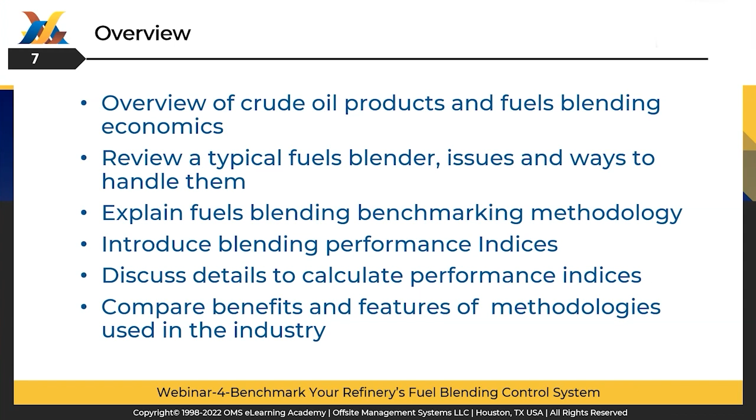If you look at 1 barrel of crude oil, there are many products—as a matter of fact, plus 5,000 products made in the refinery. Out of those products, the majority are gasoline, fuel oils, and kerosene, and they constitute about 75 to 85% of the products made in the refinery. Most of it is gasoline, which is sometimes 45 to 55%. Processing 1 barrel of crude has a processing gain in terms of volume, about 5%. Mass, as you know, remains the same.

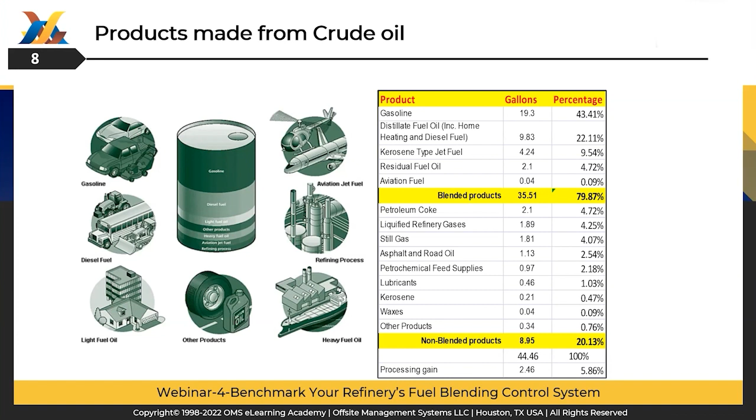Now let's look at gasoline. What happens in gasoline production? So I took an example of 100,000 barrels per day, and we say 45% is gasoline production. Taking the baseline gasoline price and all the taxes, distribution costs, refining, crude oil, etc., the profit is only 42 cents per gallon of gasoline. Now, this number could change based on the economics, the price of gasoline in the country, etc.

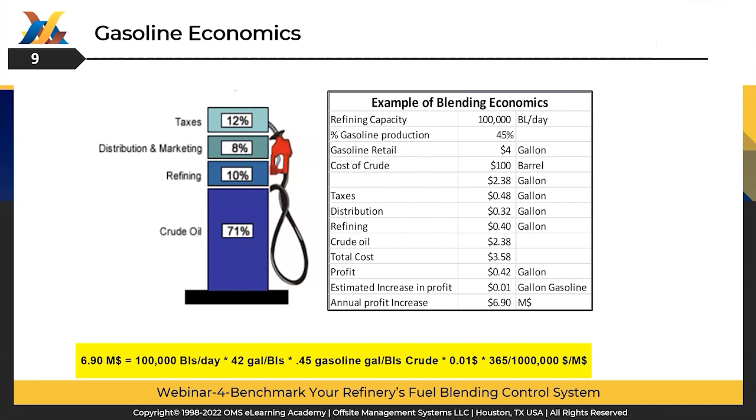But the point is that if you save 1 cent per gallon of gasoline by automation, by strategic efficiency in the blending process, you save about $6.9 million yearly. And if we say a 300,000 or 600,000 barrel per day refinery, you can multiply that number. Now, these are the benefits lost in the refining process due to inefficient blending and not having automated infrastructure. So there is a potential in crude blending, and that's why fuel blending is on the mind of refinery management.

If you look at the typical blender automation areas, it has about 11 modules, starting from lab analysis, tank farm, automatic tank gauging system, DCS, field equipment, additive control system, online and offline optimizers, blender, and terminal and dispatch system. This 11-module configuration is generic for a fully automated blending system for any refinery, and it requires no or very little manual intervention.

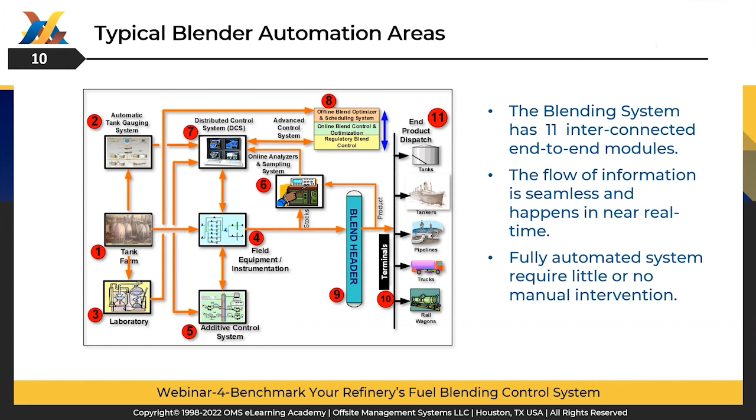So the purpose of this is, what do we know about our blending system? In my 40+ year career in downstream refining, I have done 15-20 blending projects and master plan studies. And every time I go to a refinery, I ask two questions to refinery management.

The qualitative question: I ask them, how good is your blending system? And I get an answer, oh, it is one of the best in the world. Our blending system does not need any more improvement. We don't have any issues in quality giveaway, recipe optimization.

Then I ask them the second question: give me a quantitative assessment of your fuel blending system. Can you rank your blending system absolutely or relatively? No, we cannot. But we know it's best in the world. We cannot give you any numbers because we don't know.

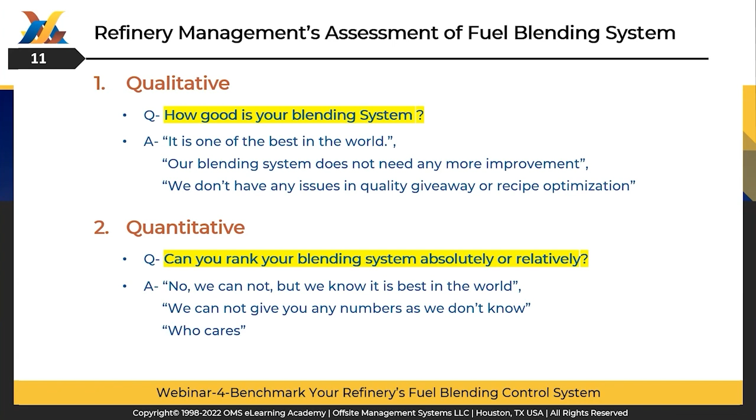Who cares? Now, this is not a made-up story of question and answer. These are real. And I have gone through this again and again over 40 years at different refineries.

Yet management has a concern, which may be hidden, not spoken very well. They always feel: is our blending quality giveaway minimized? Is our blending profitable? How does our blending performance compare to our corporate refineries or with other worldwide refineries? If we have to automate or revamp our blending system, what's the budget? What's the ROI? And how long will it take to get our money back? Or do we have enough trained blending engineers in the refinery who can maintain the system and execute the project?

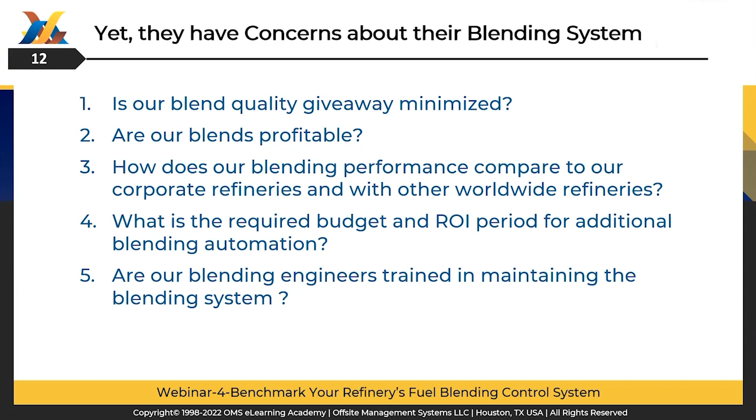So these are the questions they always have in their minds, but they don't know how to answer them. So what do they do? They have 4 options. They sometimes award a project to companies or consultants who conduct a master plan and feasibility study.

It costs around $100,000 to $150,000 for a study and takes 6 to 12 months. The advantage is it has a very detailed study and it creates a master plan for revamp. The disadvantage is that it does not address the blending in detail and does not offer KPIs to monitor after the revamp is done.

The second, less expensive option is they use refinery engineers who have 5 to 10 years of experience and do a similar type of study. It takes $15,000 to $20,000 per study and takes 1 to 3 months. It has a low cost, but again, it does not have enough in-house expertise to look at the blending system and say, hey, this is where we stand. I can rank it, I can see it, but it doesn't answer all the benchmark questions.

The next option they have is to participate in an external survey like Solomon Associates, who do a survey every year or every 2 years, and they look at the APC and blending. I've seen one of those surveys. What they do is sort of a survey across the industry, but it does not compare and benchmark the blending system per se. So again, it has some advantages and disadvantages.

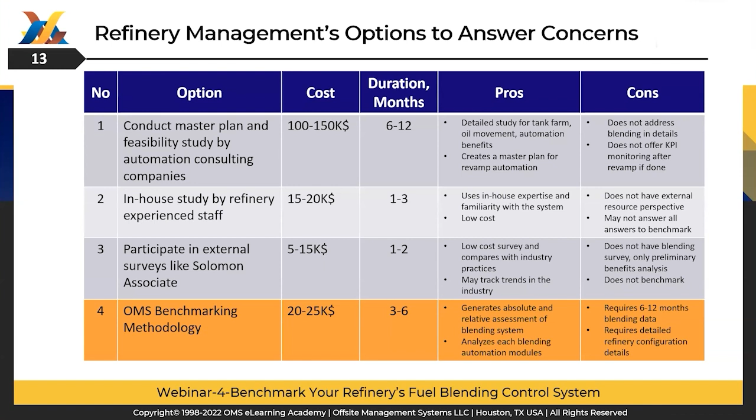So the concept of benchmarking a fuel blending system starts with creating a gold standard for a fuel blending system. Now, whenever you do benchmarking, you have to compare with something. What is your ideal situation? What is the ideal configuration?

And the gold standard should be refinery-independent with maximum level of objectivity. What I mean by that is, if I do an assessment and somebody else does the assessment, their own views should not have much impact on the benchmarking system. It should be plus or minus 10%. That's the purpose of the gold standard.

It should take into account how it gets affected by manpower, automation, HSE (health, safety and environment), and tangible benefits. It should generate qualitative and quantitative assessment ranks to compare with other refineries. It also should assess how effective the refinery infrastructure is for the blending system and how efficiently the blendings are executed.

It should have a definite map to compare with the gold standard, and accuracy should be plus or minus 10%. And it should give a pretty good idea of how long it will take to achieve those ROIs. So we're going to discuss all this in detail, but these are the concepts and guidelines for creating a benchmarking system.

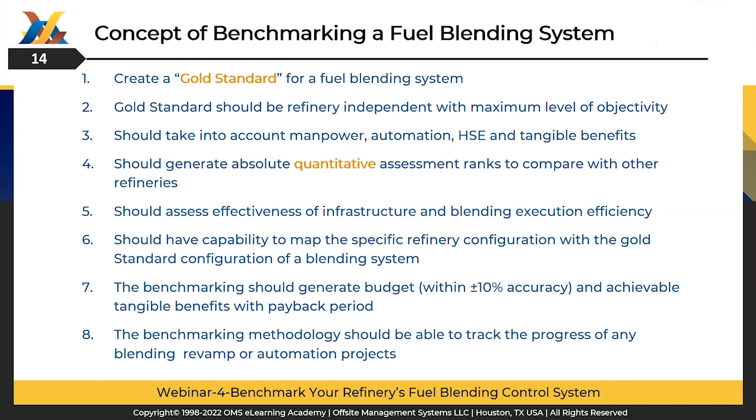So what is a gold standard? Let's look at a blends component circuit. What is the ideal configuration?

So I have two tanks for a single component and two tanks for a single grade. Now, if I have an ideal situation, ideal configuration, and this is real - I've done refineries in USA and other countries.

Each component should have two tanks, and it should have operated manual valves at the inlet and motor operator valve at the outlet. It should have sufficient pump to pump the recipe based on how much flow it has to pump to the tank, and it should have a spare pump in case one pump burns out, so it can switch to another pump.

Pressure controller to circulate and start the pump. Then we have a motor operator valve, control valves on the inlet of the blend header, before the blend header, and then the inlet to the tanks. Now, this configuration is the gold standard to completely automate the blending process.

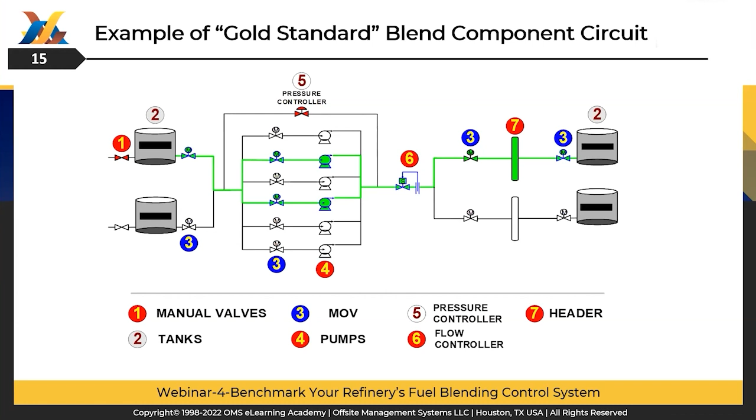Now, if I have an 8 component blend, I should have 16 tanks for the components. So we compare this gold standard with what refineries have in their configuration. This is just to give you an idea for one component circuit, and likewise we have the gold standard for all the 11 automation modules that I discussed before.

So in the concept of benchmarking a blending system, we create 2 indices to answer the question: Automation Effectiveness Index, that answers how automated are blending operations. The second, Operational Efficiency Index, asks how well are blending operations executed.

It reflects individual refinery potential. It generates budget estimates, return on investment and payback period, and allows meaningful comparison between refineries, whether it's in the same corporation or another corporation.

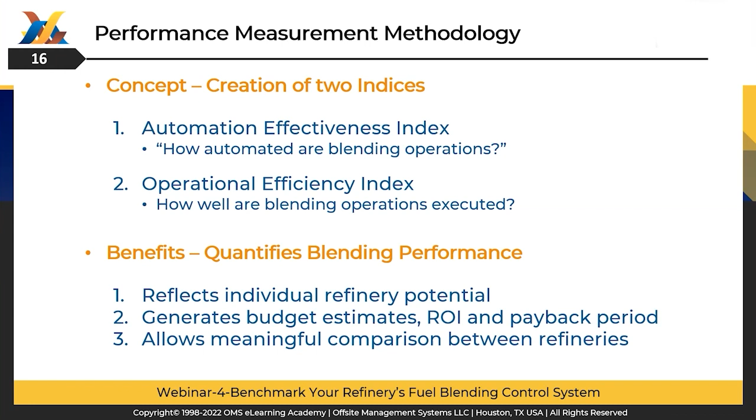So in terms of top-down methodology for benchmarking, the first step is we create a refinery independent gold standard baseline. We categorize each system module.

We give relative weights of significance of each module - tank farm versus the analyzers and so on and so forth. And then we'll drill down each module component and the relative weighted significance. You will see all this in detail.

Then the second step is we take the gold standard and compare with the refinery configuration. How much does the refinery have? It has an 8 component blend - so does it have 16 tanks for the components or 10 tanks for the components? And how they juggle around between tank to tank.

Then we assign weighted ranks for all the drill down components and composite weighted ranks of module. Then the next one we do the execution efficiency and loss benefits.

For that, we re-optimize the historical blend recipe for 6 to 12 months that the refinery had done and compare with the executed recipes, and summarize the lost tangible benefit. We'll go in detail.

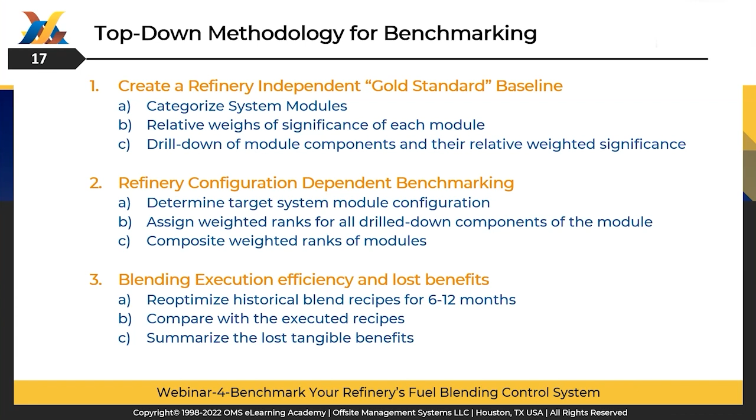So step 1, we assess the automation effectiveness of the blending infrastructure. Now, infrastructure means all things that you can feel and see: tank farm, analyzer, pumps, valves, blenders, and so on and so forth.

So you have 11 modules, and for each of the 11 modules, we create a gold standard blending system or sub-module. So we look at each and every module of the blending system. Then we...

superimpose the manpower, automation, HSE, and benefit factors. So there are 4 factors for anything that affects the automation - not only of blending, but anything in a refinery or any manufacturing plant. And then we generate a generic relevance matrix based on that.

And then we superimpose a specific refinery blending system configuration, and we create the refinery specific ranking matrix. And then at the end, we create 2 indices: effectiveness and efficiency.

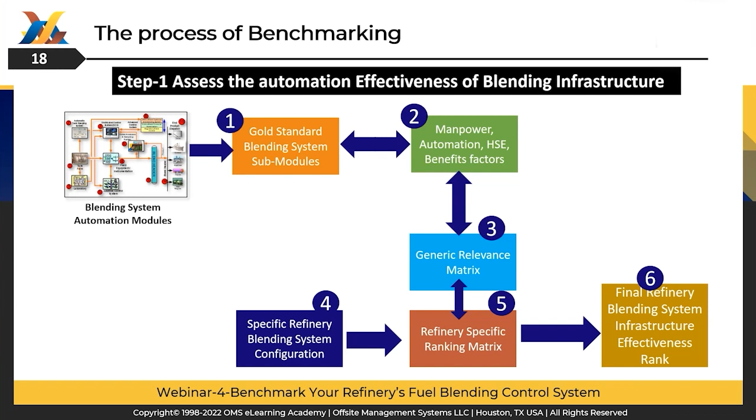Now, if you have attended our previous webinars, we talked about the MCOR strategy for the blending system in general, and specifically for the refinery.

For managed infrastructure, it comes to tank farm, tank gauging system, field equipment - anything and everything used to manufacture and control the system. Then we come to the control manufacturing aspect of MCOR, which has a control system, regulatory blend control system (RBC), advanced control system, offline optimizer, and scheduling system interfaces.

Then we go to the optimized production. It has linear, nonlinear blend models, optimizers, and customized blend model parameters. And finally, reconcile the blend models.

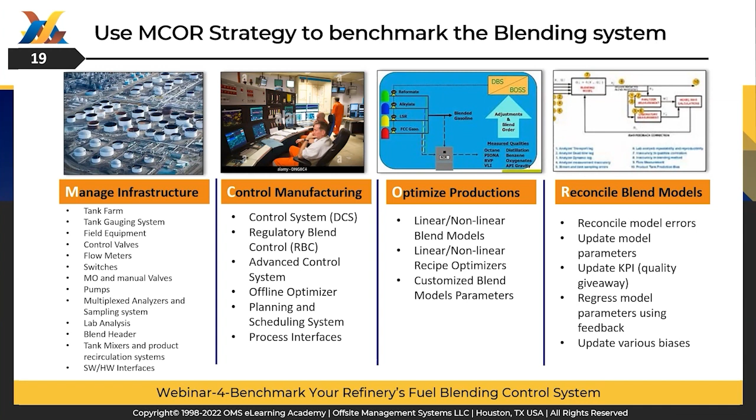How did we do? What are the blend errors? Our blend model parameters update KPIs, quality giveaway, regress model parameters, and update various biases. So we break down our benchmarking system into 4 areas: MCOR.

Now, taking the blending system and all 11 modules, we come up with a relevance percentage matrix. It means how relevant is tank farm, 9%, tank gauging system, 13%, and we come up with all these numbers which total up to 100. Now you may wonder, how did we come up with these numbers? What is the criteria behind it? What is the rationality behind it?

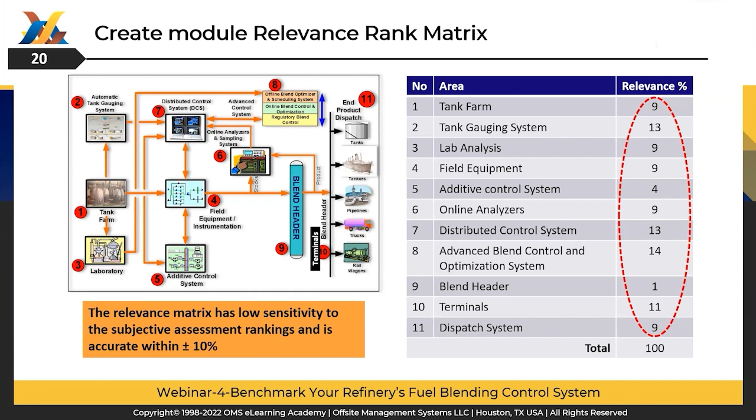Let's see it next. So for each of the relevance factors, there are 4 variables which are affecting those metrics. These are manpower, automation, health safety environment (HSE), and tangible benefit. Now, in my experience of 40 plus years in downstream refining, I saw that we can allocate the relevance factor as manpower 15%, automation 35%, HSE 20%, tangible benefit 30%.

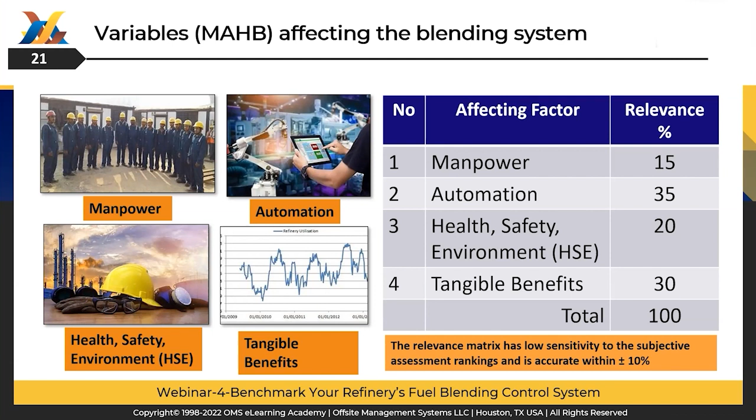Now the question will come to your mind: okay, this is what you did, Dr. Agrawal, what if I have to do that? Yes, there's a little bit of subjectivity in this assessment, but no matter how you do it, the accuracy will still remain within plus minus 10%. The sensitivity is very low, and we'll see how it is possible.

So in terms of manpower, what does it mean? It means the manpower in the field has to start and stop, close and open field equipment, tank sampling for analysis, manual tank gauging. Not every refinery has an automatic tank gauging system, meter analyzer calibration, etc.

Automation, we can do those: manpower in terms of auto start, stop, valves, field equipment, online analyzers, tank gauging system, auto analyzers, calibration. In terms of health and HSE: tank spills due to overflowing, valve leaking, fugitive emission of tanks and field equipment, pumps tripping, explosion and fire hazard. The benefits: real-time tank inventory, increase in blend productions, minimum quality giveaways, and oil movement, etc. So all these four variables do affect how we rank our blending system modules.

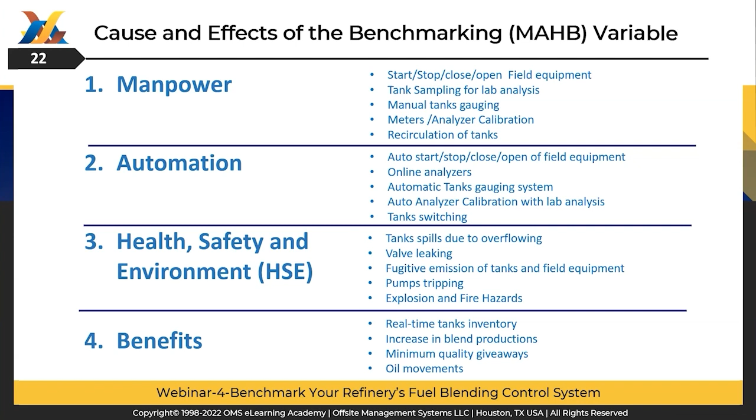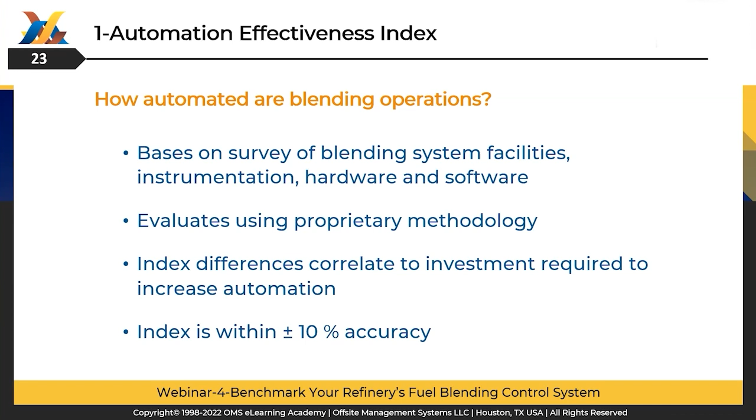So we start with the automation effectiveness index for the infrastructure. The question we ask: how automated are blending operations? Based on a survey of blending system facilities, instrumentation, hardware, and software, we use a proprietary methodology to evaluate each of the modules, then find the index correlating to required investment to increase automation. An index is accurate within plus minus 10% accuracy.

So for that, we have to create a scale. Now the scale goes from 0 to 100. So what's the minimum scale? The minimum is that all the valves, all the pumps are manual. You have to turn them manually and push them manually. You have inadequate stock tankage, manual tank gauging system, no DCS, PLC, APC. Lab analysis not available on a timely basis. Recipe based on an algebraically linear model. So this is the absolute zero index.

Now, I've seen this totally manually operated blending system in the refinery. Things have changed a little bit.

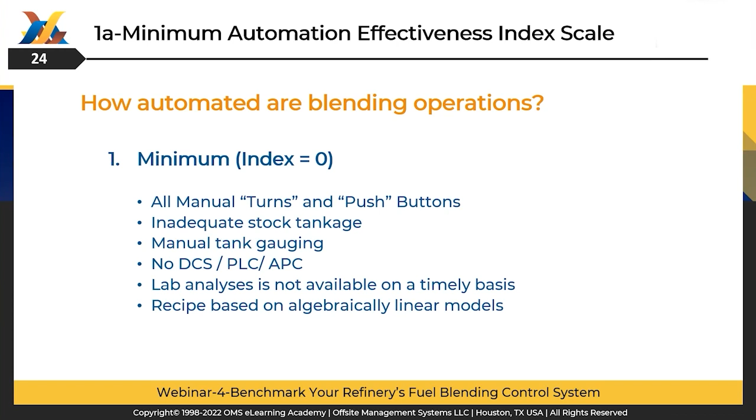So the next comes 100. What is index 100? It means a very automated refinery blending system. All the pumps and all the turns of valves are automatic and they are remote. They have enough and optimum stock tanks for the product tanks and stock tanks. Automatic tank gauging with all required signals, temperature, pressure, and density, etc. DCS and 3 layers, 3-tier blend control optimization system, online analyzers, and all that we call the gold standard of blending system. That's a scale of 100.

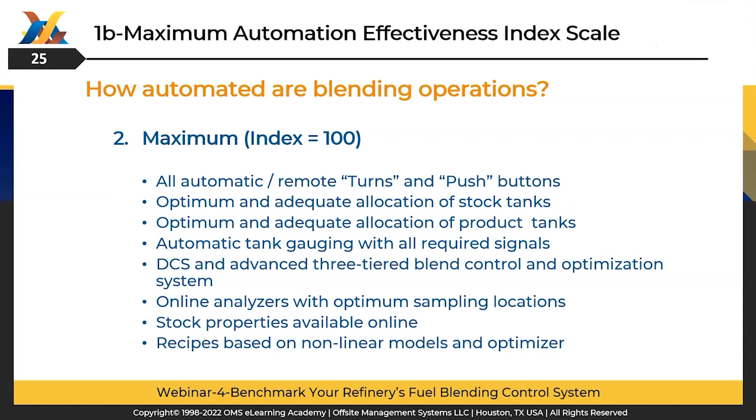So all the refineries will reach somewhere between 0 and 100. There's nothing at 0 right now and nothing at 100 right now. There's always a gap, even for the most automated refinery in the world.

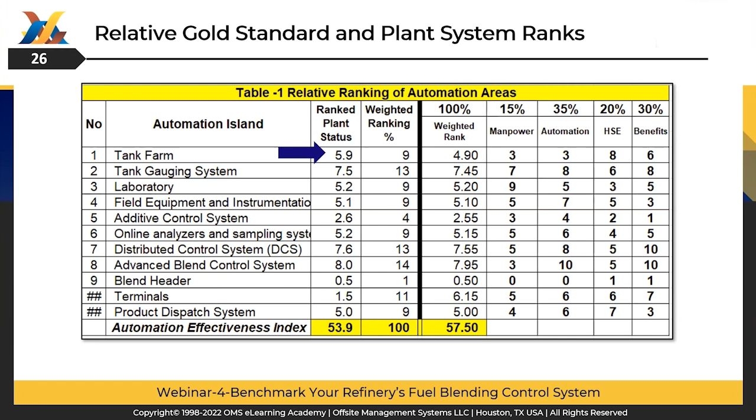So you may wonder, how did we get this 5.9 number for a tank farm? Let's look at the next one. So for the tank farm, we go in detail.

We'll drill down every aspect of it. Adequate number of paired component tanks, product tanks, automatic tank gauging system, tank alarms, interfacing, DCS, APC, streams pooling, fugitive emission monitoring, strapping table availability.

And based on that, we again go to manpower, automation, HSE, and benefits, and we give a ranking based on our experience in the industry in general or in a particular refinery in particular. And then we decide that, okay, we have a 0.53 as the ranking, and our plant is 60%.

And what does 60% mean? It means that if I have 8 component blend, and I suppose you have a 16 component tanks, but if I have only 10, so we take 10 divided by 16 and say our plant is only 60% of what's supposed to be.

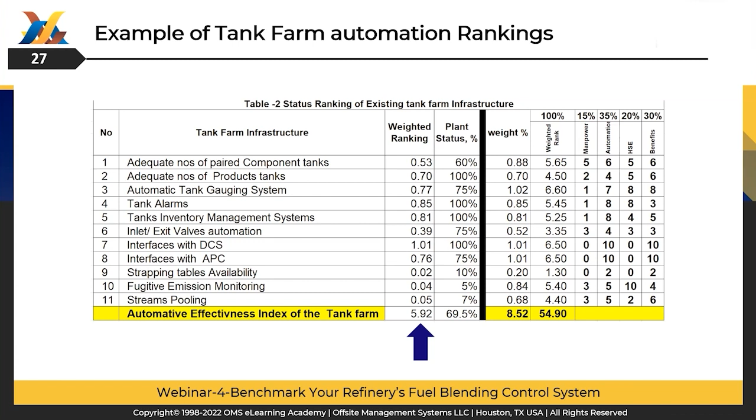And we go on so and so forth for each of the area, and we come up with the ranking 5.92. So this is the plant ranking for all the areas. It's too much to show detail for each area, but you can see the 5.9, 7.5, and we go all the way down.

And finally, the automation effectiveness index comes to 54%. It means the plant, a particular refinery, is only 50% effectiveness of the automation in terms of infrastructure. So they have about 40% room to go to perfect and reach very close to the gold standard blending system.

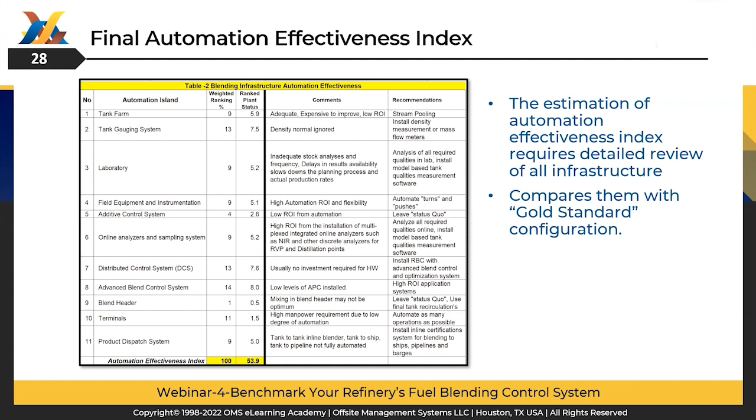The second question comes, okay, we have covered the automation effectiveness. How is our efficiency for the blending operation? So the question we ask: how well are blending operations executed? It evaluates blend execution data against best case and worst case. It measures profit improvement potential in dollars per year. It separates benefits in terms of stock economics, giveaway minimization, inventory minimization. And then it can rank against other refineries using ratio of profit captured over profit available, or other refineries in the same corporation.

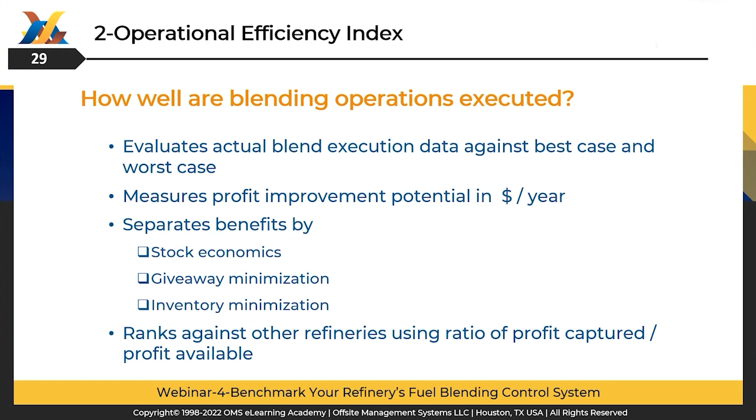So again, we create two scales, 0 to 100. For the 0 scale, the blending efficiency is batch blending - you're changing the quality of the stocks while it's blending, linear blend models, linear optimization if any, no stock use economics, linear model-based recipe. So this is the absolute 0 scale.

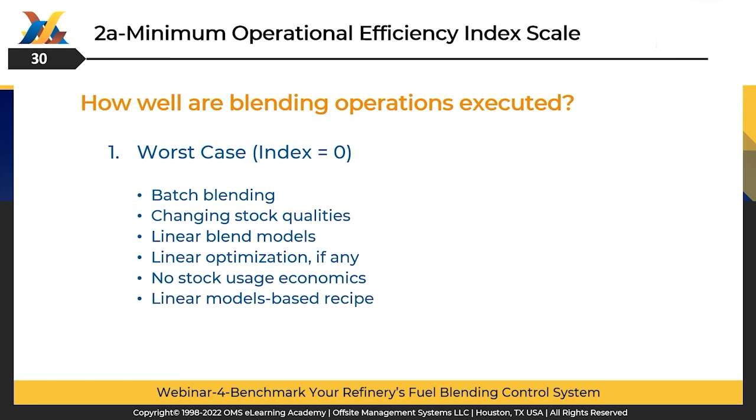This is what I could see about 30 years or 25 years ago. This was the worst case. But as refinery progress, they automate. So this becomes a gold standard, 100 on the scale, which is inline blending, online and real-time stock qualities, nonlinear blend models, nonlinear optimization, best stock usage, inventory economics, multi-period and multi-blend planning, automatic model tuning, and reconciliation of bias and production.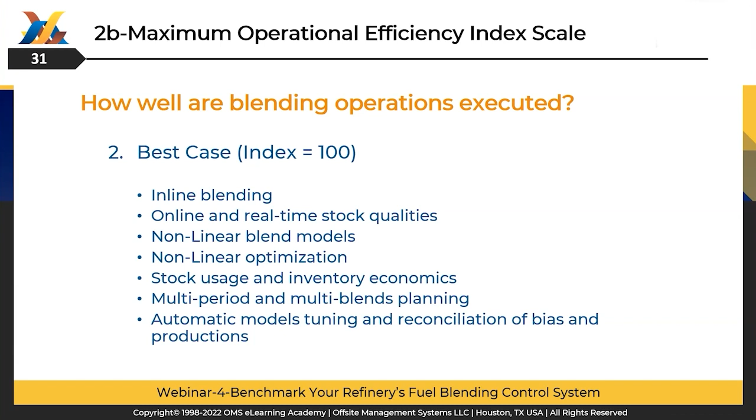So now we have created two scales, 0 to 100, for the efficiency of blending. So what do we do in step 2? We take about 12 to 18 months of blend data, depending upon how extensive we want to conduct, and we transfer this data to a specific optimizer that we use. I'll give you a little bit idea of that one. And we get general blends, batch data, stocks quality, product specification, and everything that is related to the blending.

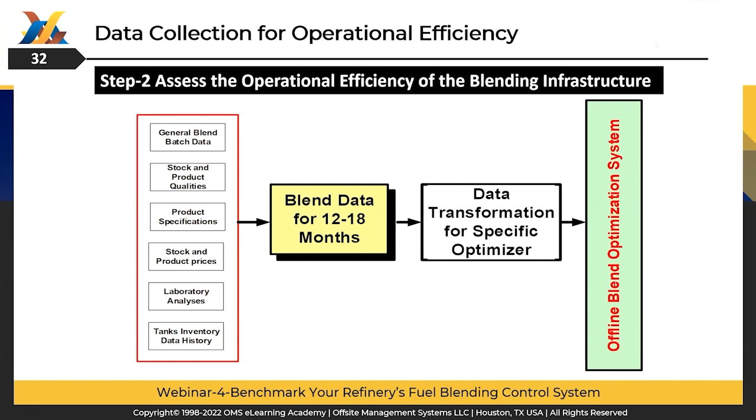Typically, about 300 blends are executed in a refinery of reasonable size, 300,000 barrels per day. So we have about 300 blend data to analyze. It could be less than that, but sometimes it goes to 3 to 6 months. And then we take a 3-part data analysis for operational efficiency. We transform the data - step 1, we create the minimum tangible benefits and maximum tangible benefits, the worst case scenario and the best case scenario.

Then we create an index scale from actual achieved benefits and an actually normalized plant index. Too much detail goes inside this - there will be some webinar in the future to go more in detail. And then finally, we take the nonlinear case using nonlinear models, nonlinear optimizer, and then we estimate the stock optimization benefits, quality giveaway benefits, inventory minimization benefits. And that completes the analysis of efficiency of the blending operation.

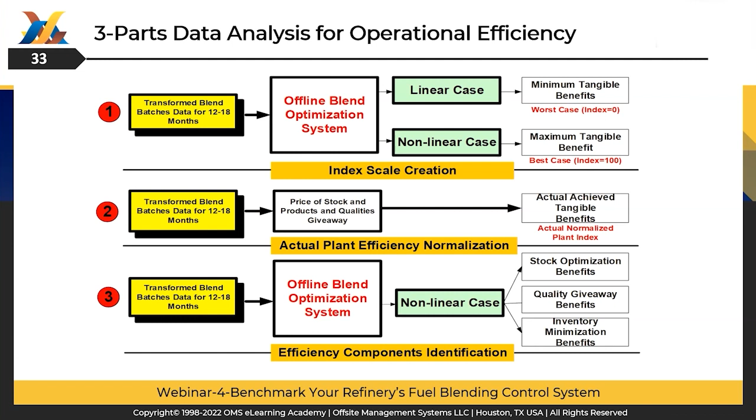We use a sophisticated Excel-based optimizer that our company had developed. It uses nonlinear blend models and a nonlinear optimizer, and it updates the bias and all the things. This is an automated analysis tool for those 300 blends - it's not a manual operation. Once we start the system, it takes data for 300 blends and it creates the analysis.

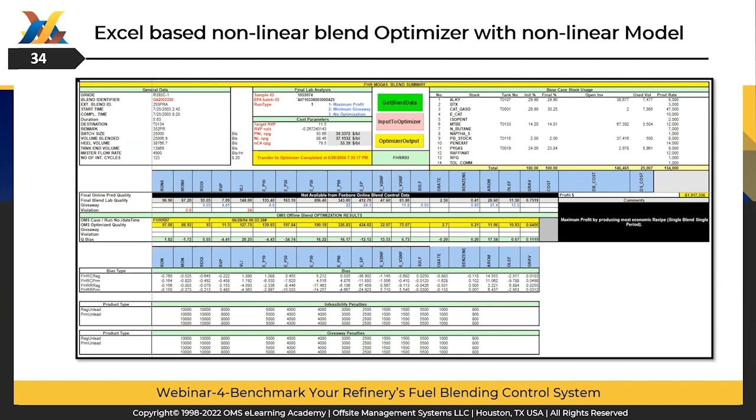The optimizer interfaces with retrieving blend data directly from the plant or from the input Excel sheet. Then it does the nonlinear optimization using nonlinear blend models, and it generates the calculated benefits.

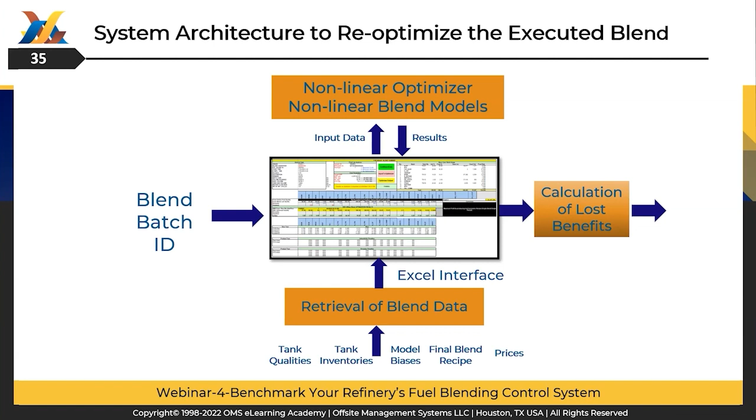This is a study I did for a 275,000 barrels per day refinery. We took three months of data, and you can see the benefits lost was $42 million per year, which amounts to about 6 cents per gallon.

Typically, the industry average is about 2 to 3 cents per gallon worldwide. This particular refinery had very inefficient blending operations, as we discussed before, which is why the benefits were huge, about $42 to $44 million. This is not out of line—typically, industry average blending benefits are anywhere between $25 to $35 million per year.

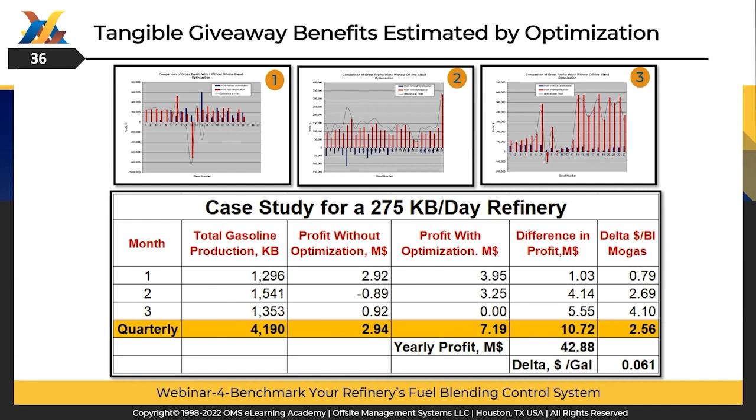We then analyze the efficiency from different aspects of the blending system and give a rating. We came up with 65% as a rank for the particular refinery in this case study. This number could be better for a fully automated refinery, or could be worse.

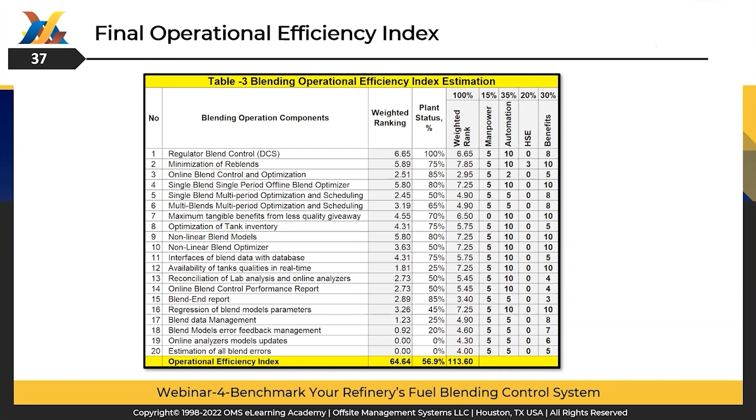So how do we use these two indices? We have shown a 0 to 100 index, and we have shown that the automation effectiveness index is 54% and operational efficiency is 65%.

The 54% automation effectiveness index gives you a sense of how much investment the refinery has to make to move further toward 100%, or close to full effectiveness. The 65% shows how efficient your blending operation should be, and how much tangible benefit will be realized once you move from 65% to 100%.

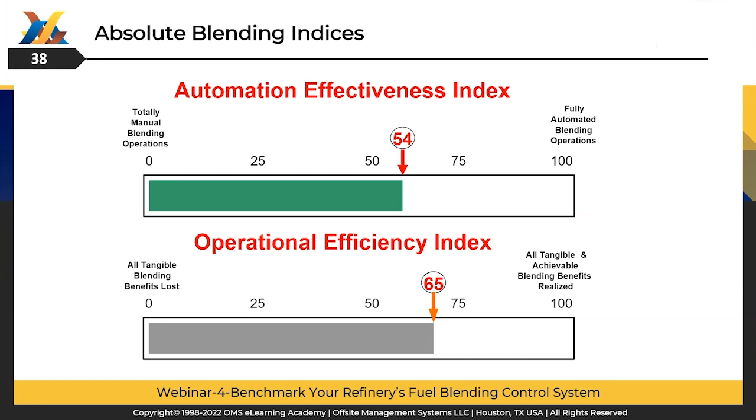This is based on investment and tangible benefits. Typically it takes about $6 to $10 million for a refinery blending system revamp and upgrade. Taking that as a benchmark, you get an additional benefit of about $10 to $50 million. So it gives you room in terms of ROI and time factors.

These two indices and their comparison can give you an exact idea of where you stand in terms of ranking in the industry, in the world, and also, if you need to improve, where should you spend money, and how much benefit you'll get from that spend. This is not an abstract benchmarking—it's an absolute and relative benchmarking system that we have developed for refineries.

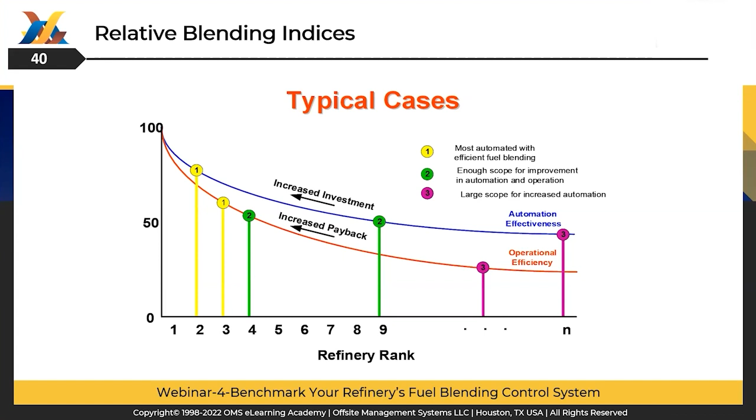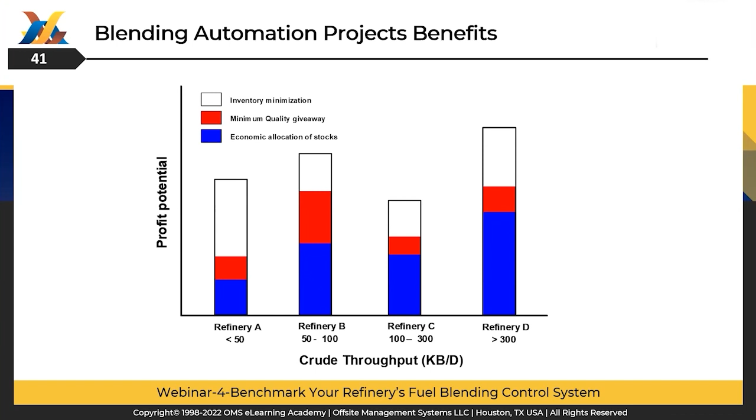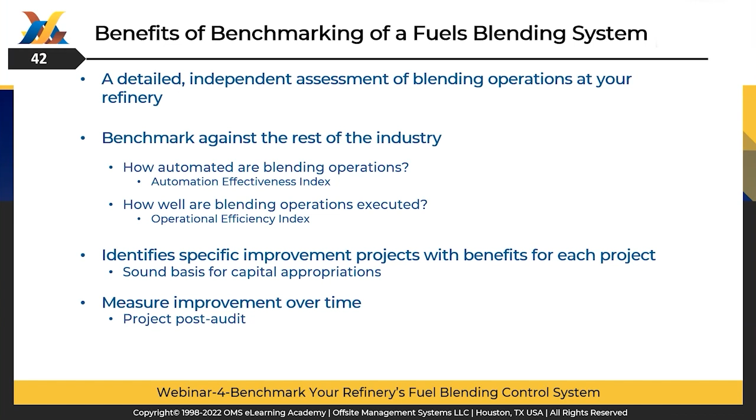In this webinar, we discussed common blending issues and outlined ways to handle them. We introduced two blending indices, automation effectiveness and operational efficiency, to measure the blending facility. We detailed the generation of these two indices and their actual usage in ranking blending facilities, absolutely and relatively, and discussed their usage in estimating capital investment or for post-audit purposes. That ends our presentation for this webinar.